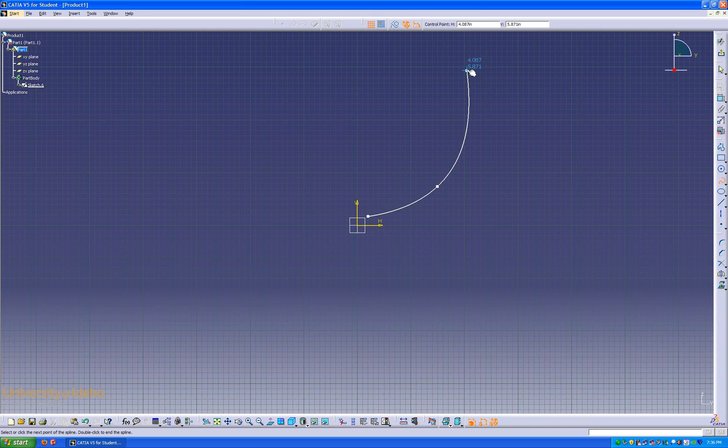To start, we'll create a sketch on the front plane that will then become the bowl of the wine glass, and we'll do this simply by creating a spline. That looks good. And then revolving the sketch using the revolve command.

When selecting the revolve command, we're asked for two things, a profile and a revolution axis. For the profile, I'll select the sketch that was just created, and for the revolution axis, I'll select the V axis. A preview is presented once both those two things are selected, and that looks fine.

If you wanted to create something that wasn't revolved a full 360 degrees, you could change that by changing one of the two angle limits. But that looks fine for what we're doing now, so I'll hit OK.

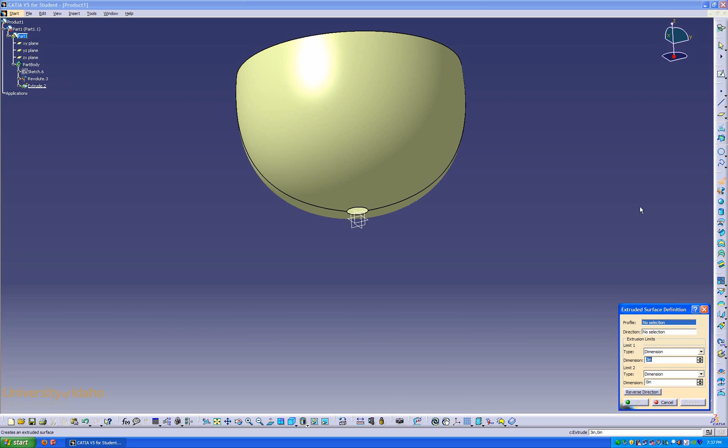Go ahead and hide the sketch that was just created. The next step is to create a stem of the wine glass, and to do this we'll be using the extrude tool, located here. Once selecting the extrude command, we're asked also for a profile and a direction.

For the profile, I'll select the circle that was created using the revolve command, and for the direction, I'll pick a plane normal to the way I want the stem to line up. So I'll select this plane.

As you can see, it presents us with a stem going the opposite direction that we want, so we have to hit reverse direction. There's two ways you can change the length of this. You can either change it in the limits, or you can simply drag it to where you want it to be. That looks fine for what we're doing, so I hit OK.

The next step is to create a base, and to do this we'll be using the multi-sections surface tool, but we have to create a base sketch first.

To do this, we have to create a reference geometry that we can sketch off of. So I'll select this plane, and select the reference geometry plane.

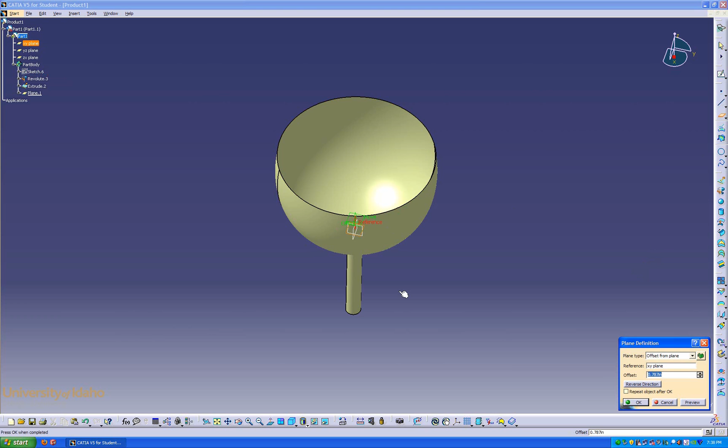And as well, it offsets it in the opposite direction that we want, so I'll hit the reverse direction. I'll simply drag it down to where I want it, and it looks fine.

Once the plane's created, we can create a sketch on it, and this will become the base of the wine glass. Just a simple circle will do for this.

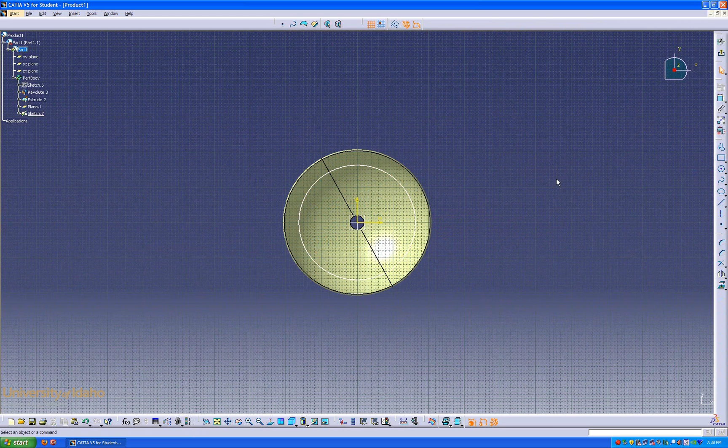Now that we have the sketch, we can click on the multi-sections surface tool. This asks for simply any of the edges or surfaces or sketches that you need to create to select the surface. So we'll select that sketch and the edge of the extrude that was created.

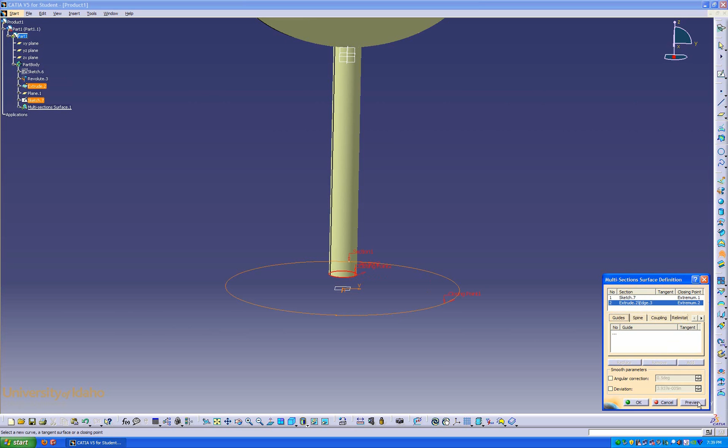Notice that for this command there's many options presented, but for what we're doing here we're only going to go with the two selections that we've created, and we can click the preview button to see what that looks like. That looks good, so I'll hit OK.

The next step is to fill the concave surface that's created by this multi-sections surface, and to do this we'll be using the fill command. For the fill command, you simply select all the edges or surfaces for which you want to fill a gap.

We want to fill this surface here, and once you're presented with a blue box that says close contour, then the computer says it's okay to fill. You can preview this, and that looks alright, so I'll hit OK.

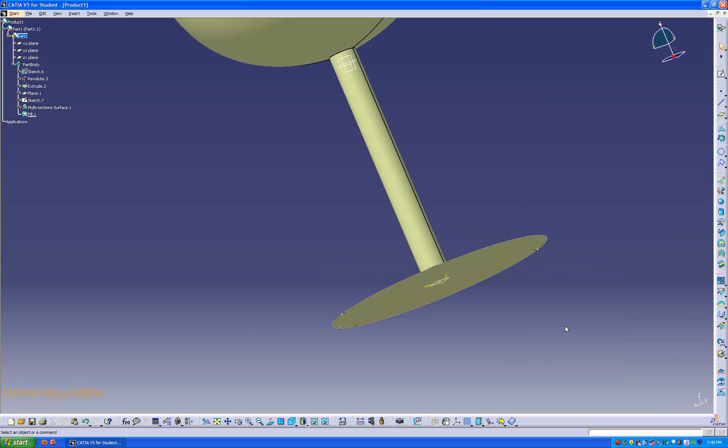I'll go ahead and hide the sketch that was just created for the base. The next step is to create a thickness for the bowl. As you can see here, the thickness of the bowl is quite thin, paper thin even. To do this, we'll create an offset of the inside of the bowl.

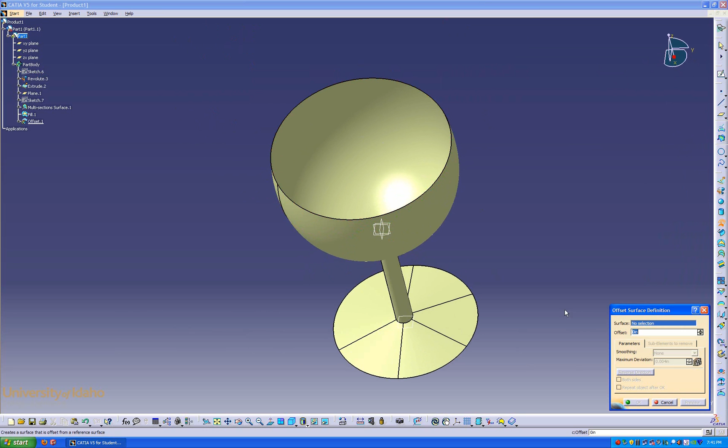So we'll select the offset command, and it asks for a surface and an offset distance. For the offset, we'll select the bowl, and you can switch the direction on this, but it's in the direction we want. Then you can drag it to the certain offset you want, or you can use the distance on the offset here. That looks fine, so I'll hit OK.

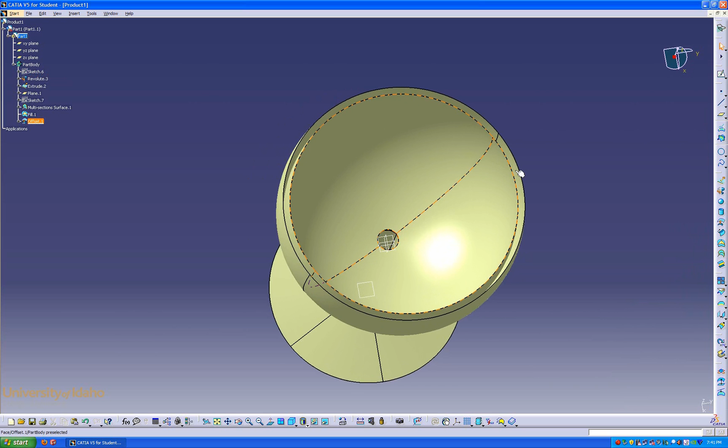This then leaves us with a small valley that's created between the two offsets, or the two surfaces. To give us a nice curved surface, we'll be using the blend command, located here.

The blend command asks for many selections before it can produce a nice blend: the first curve, second curve, first support, and second support. For this, we'll simply select the offset and its surface. Then for the second curve, we'll select the outer rim and its outer surface as well.

Just like the multi-sections surface tool, this is also presented with many options that we can toy around with, but for this, we'll simply be sticking with the basics. For the blend, we can go with a point blend, a tangency blend, or a curvature blend, which produce slightly different curves each.

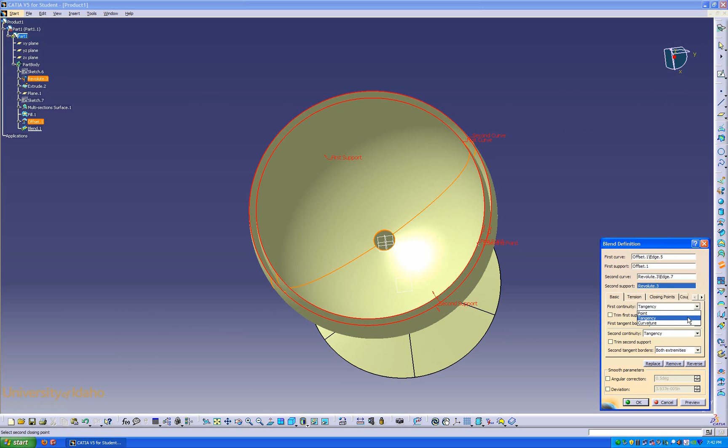The point blend actually produces a flat surface if you preview it. But for this, we want a nice curved rim, so we'll go with the tangency curve, and go ahead and preview that. That looks good, so we'll hit OK.

We'll go ahead and bring the glass back to center, and that's how you create a wine glass using the wireframe and surface design workbench.